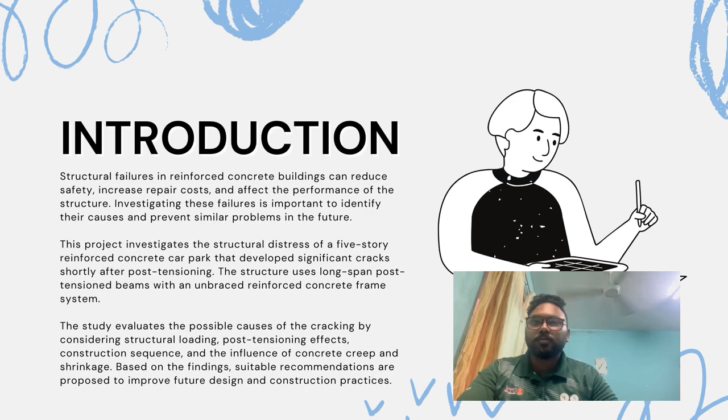However, if the design, construction process or post-tensioning procedure is not carried out properly, structural problems such as cracking may occur. So now let us go through to the background of our project.

So for this project, we investigated a 5-story reinforced concrete parking garage that experienced significant cracking shortly after construction. The building was constructed using long-span post-tension beams and hollow core slabs. It was designed as an unbraced reinforced concrete frame to provide a large column-free parking area.

To speed up the construction process, the post-tensioning force was applied only 3 days after the concrete was cast. However, within 5 to 6 days after stressing, cracks wider than 0.7 millimeters appeared in both the beams and columns. This indicated that the problems affected the entire structural system rather than just one isolated area.

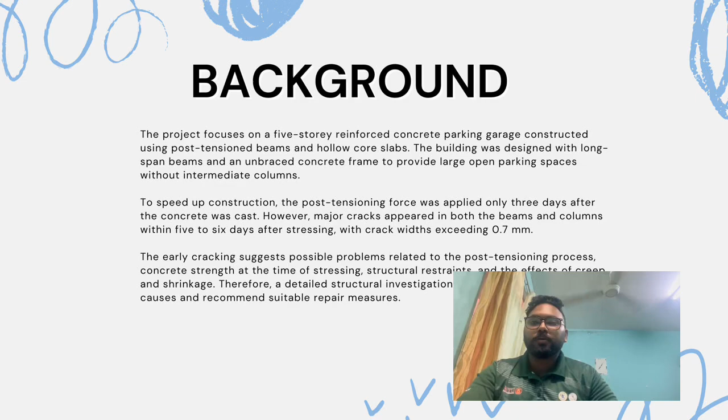Our investigation focuses on identifying the possible causes of these cracks by studying the structural loading, post-tensioning effects, construction sequence, and the time-dependent behavior of concrete, including creep and shrinkage. Based on our findings, we also propose suitable recommendations to help prevent similar structural failures in future projects.

Thank you. Okay, so next we proceed with material and structural assessment. So, concrete material assessment. The first one is to verify whether the concrete had achieved sufficient strength before post-tensioning was applied.

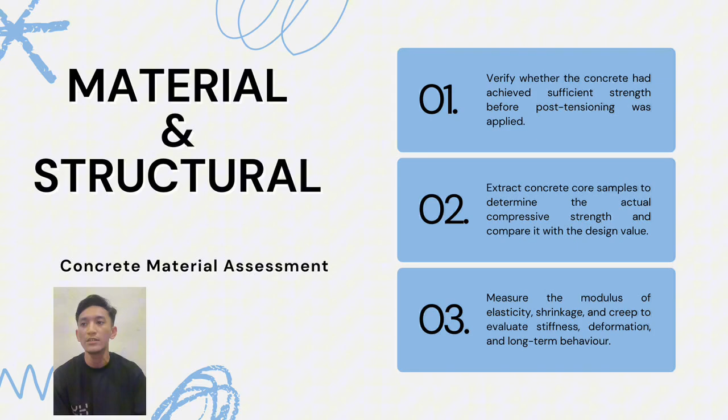The second one is to extract concrete core samples to determine the actual compressive strength and compare it with the design value. The third one is to measure the modulus of elasticity, shrinkage and creep to evaluate the stiffness, deformation and long-term behavior. So next we go with the reinforcement and post-tensioning assessment.

Post-tensioning assessment is to inspect zones for cracking, grout leakage and bearing plate deformation. Other than that, we need to use ground penetrating radar (GPR) or reinforcement scanners to locate reinforcement and tendon profiles.

Other than that, it is also to identify any construction defects or deviations that may have contributed to the observed cracking. The last one is to check concrete cover, reinforcement spacing and tendon alignment against the drawing. The last one for the structural and material assessment is structural evaluation and non-destructive testing.

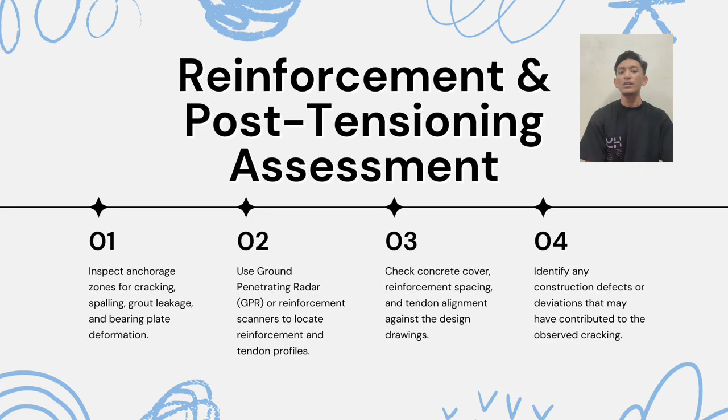The first one is to conduct ultrasonic pulse velocity testing to detect internal cracks, voids, honeycombing and concrete defects. Other than that, carry out detailed crack mapping by recording the width, length, orientation and distribution of cracks. The third one is to monitor crack development over time to determine whether the cracks are stable or still propagating.

The last one for the structural evaluation and non-destructive testing is to integrate all inspection and testing results into the structural analysis to determine the root cause of the structural distress.

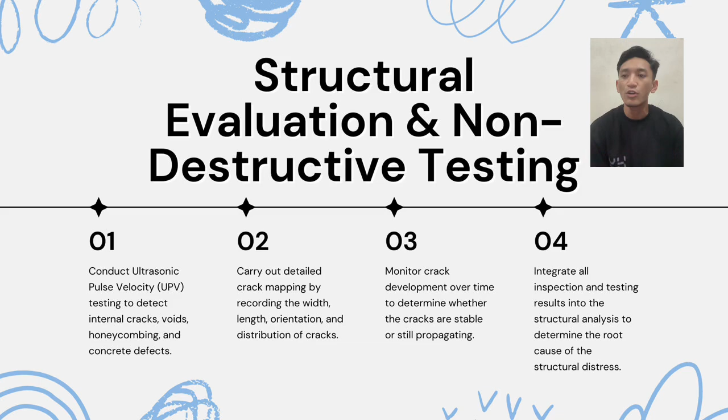Hi, my name is Muhammad Hadif bin Abdul Malik and I will explain about structural analysis. For case 1, which is gravity load only, we get a design load of 126.47 kN per meter. After that, we calculate the shear force.

For the left side, we get 986.5 kN and for the right side, we get negative 986.5 kN. And for the column, for both of them we get 1135.8 kN, which is a constant rectangular block.

And then we use the moment distribution table to get the moment for each member. For the left side and right side, we get 2044.9 kilonewton meter, and for the middle moment, we get 1802.4 kilonewton meter, and for the column at the base, which is joint A and D, we get

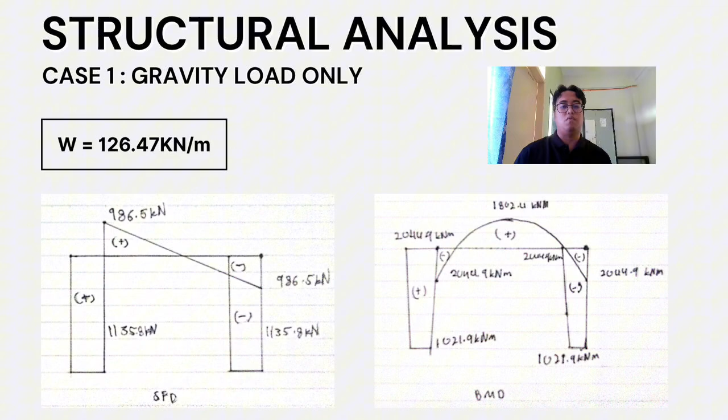1021.9 kilonewton meter, and also at the top, which is joint B and C, we get 2044.9 kilonewton meter. And now for the next part.

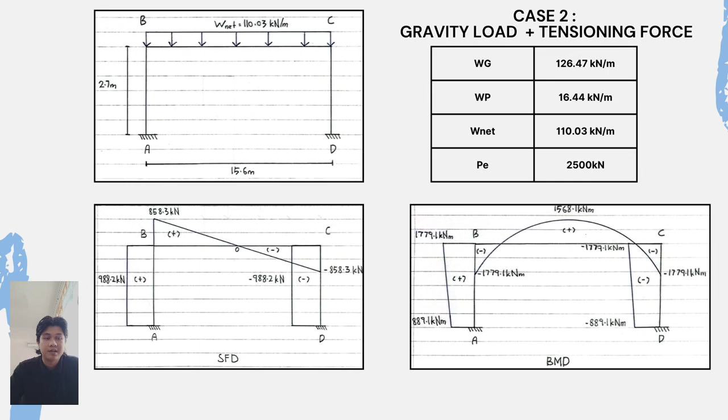So case 2 shows that post-tensioning reduces the gravity effects, but it must be controlled properly because it can still contribute to cracking if applied too early or if restraint is not considered.

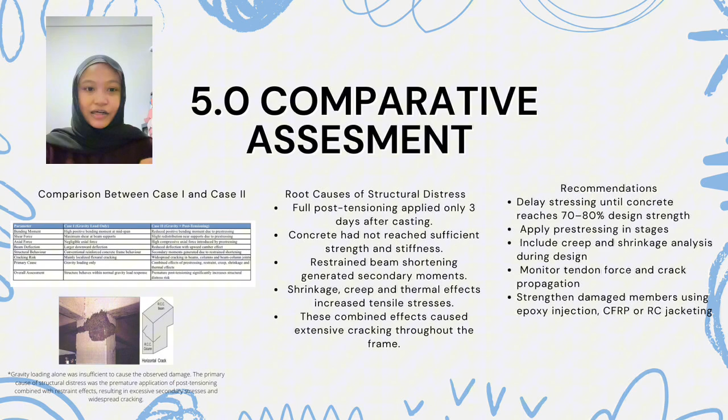And in conclusion, although post-tensioning can significantly improve structural performance, it must be applied at the correct time and under proper construction control. Otherwise, it may lead to premature cracking and reduce the durability and serviceability of the slab.